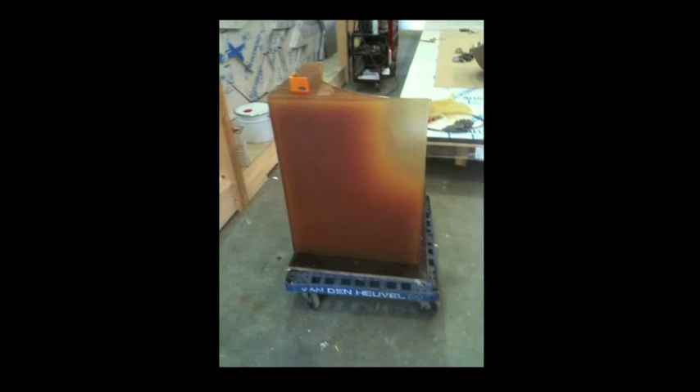Here you can see we did a few experiments just to test effects and to also test how the frame would work, if you would notice the frame. Well, you didn't notice if you painted it in the right color.

The other tests we did were actually on surface. We were very aware that there was a very practical issue with this thing. We knew that we had to make this interior out of polystyrene, very cheap polystyrene, and it was very easy to handle, so that would be the interior element. Then we had to find out how it would actually react to this artificial rubber, and whether you'd get a dirty surface. So what we did was a number of experiments where we used different oils.

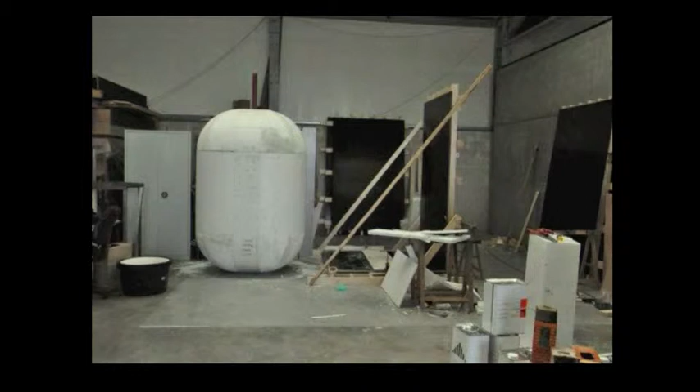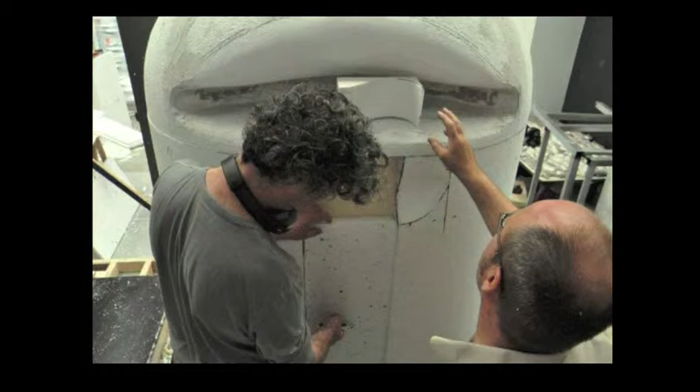In the end we discovered that, well, here you can see the interior. This was the polystyrene interior of the rubber house, and here you see the people actually working on it. It's like a sculptural object. Very funny. You build an interior as a massive thing.

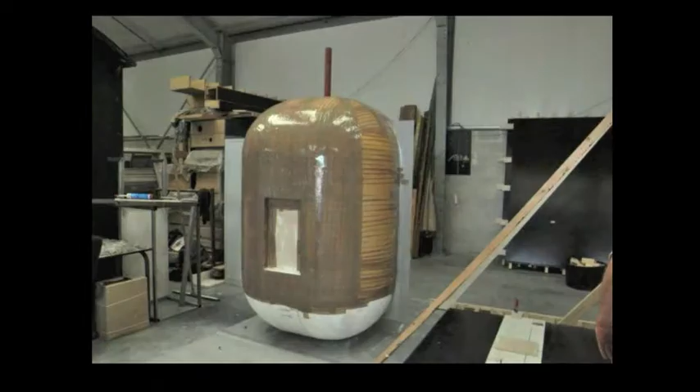For us, the most beautiful way to treat the surface was actually to use this very cheap plastic tape and cover the whole object with it, because we knew from experiments that you would get a kind of three-dimensional print on the surface of the interior that suggested something organic, since the tape wasn't regular and had little differences in it. We found that very beautiful. So we used the tape, sprayed a little oil on it, and then the pouring started.

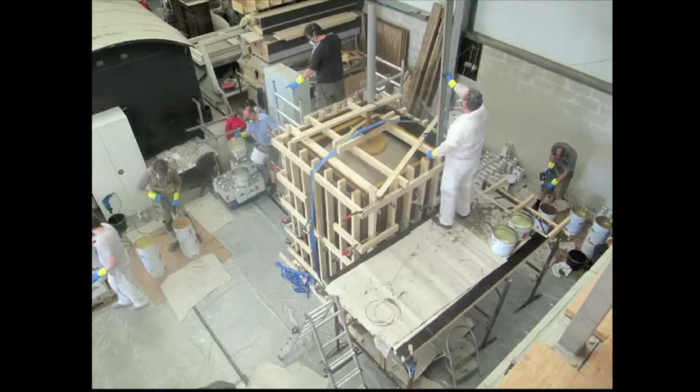Since we didn't know the effects of this amount of artificial rubber, we didn't want to take any risks, so people used all kinds of masks for chemical reactions. Some people warned us that with this amount you'd get an enormous heat, and others said no, it wouldn't happen. So we were prepared for the worst, but everything went well.

Here you can actually see the cube. Inside is the polystyrene interior, and then everything is poured in. Then when the pouring was finished, just like concrete, it didn't take much longer.

Then we had to get out the polystyrene. Some people said you could maybe use some chemical stuff, but we didn't trust it, also because we thought it might affect the surface again. So actually the demolishment of the polystyrene core had to be done in a very funny way. There was a kind of hole in the rubber house, at the bottom, and they simply dug their way in, just like people digging for precious metals.

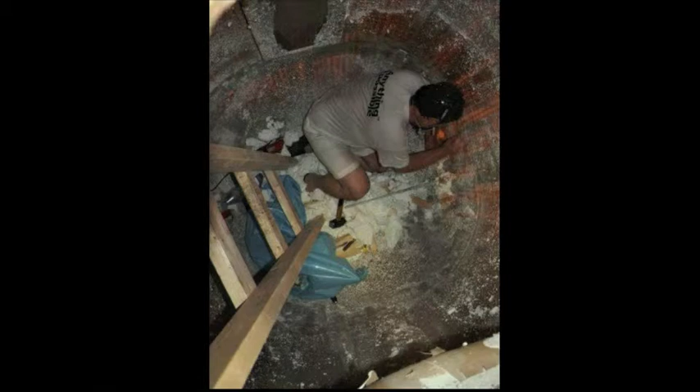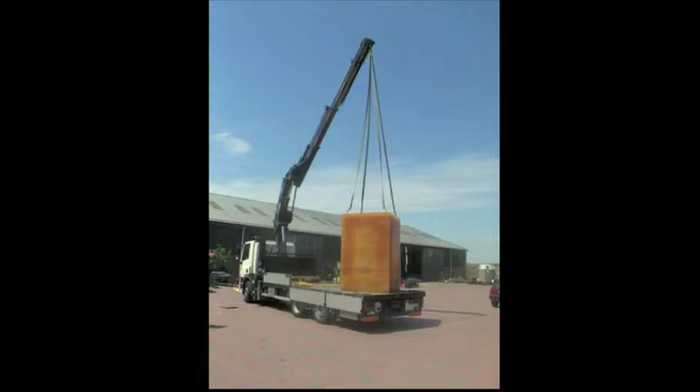Here you can see it in the final phase. He has already removed most of the polystyrene and is now very precisely removing the last parts. This phase actually took a lot of time, and the builders really underestimated it. But they were also very nice, and they did it. Then it was finished, the rubber house was finished.

Actually, the metal frame we used to make sure it would stand up proved to be very important, because we used the metal frame to have removable screw eyes placed on top, so that we could transport it. Then when it was in the right place, you could pull these things out again very simply—you just needed a ladder—and then the rubber house had a flat roof again. Here you see it standing in front of the place where it was built by these very friendly people, still with these things on top, ready for transport.

And here you see the final image. It arrived in Germany and was used for a performance by the theater play, in a very beautiful setting in the evening with lights on it. So that was a very interesting project, a very small project. We had just enough money for buying the materials—we didn't make any money out of it. We were in a lucky position.

I was talking about the 90s and how good it was for Dutch architects, because we, as a very small office, got a very big commission called IJdock. I'm going to show some things about it. We actually did two buildings in this huge block—an enormous block with a parking underneath, standing in the water in the IJ, very central in Amsterdam.

It was an artificial block, and there were four architects working on it. Our office was doing this building and this building, and other offices were doing other parts. One office did the parking and the public space, another did the Palace of Justice at the head of it, and another office was doing a big hotel for a Spanish company.

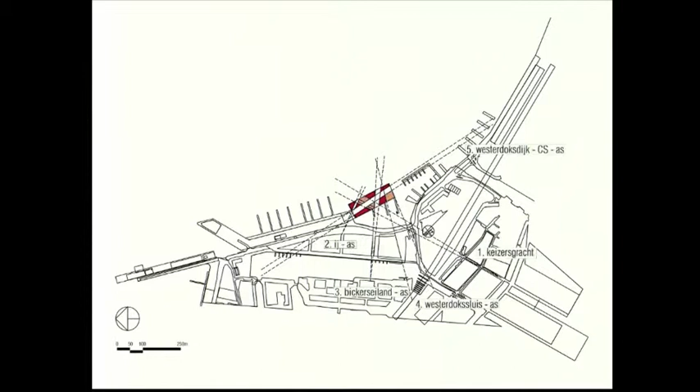Because what was the idea? You had in red this urban block, and then they said, okay, we just fill this block up, and then we cut out simple cuts that are related to the environment, and we kind of exaggerate that a bit. It's really like a piece of styrofoam.

Putting on the cutter and cutting out these spaces. And you see, this was the urban plan, so we didn't design this strange shape. If we had to do this building, we probably would have done it differently, but we had to design how these things would look, exactly how these facades would be, and also try to get the floor plans right in there.

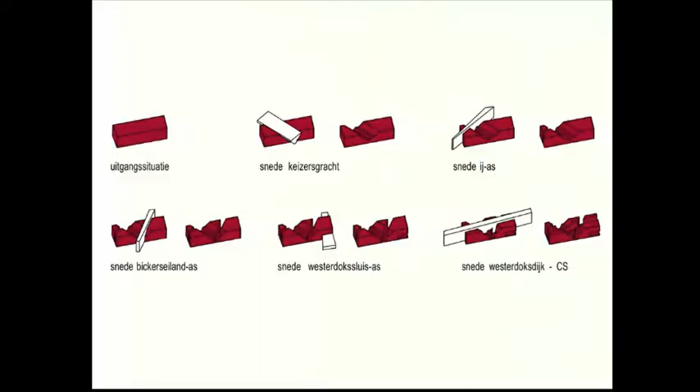Well, this was also a project that took a lot of time. We had discussions with Enrico about architecture being some sort of time machine, and he said that it happens a lot in Milan, but also in the Netherlands. This project took a lot of time. We started in 1999 - I think the urban plan was already a few years old then - and we finished it actually last year. So you can imagine, took a lot of time.

We did two buildings: one office building, a small office tower, and one housing project. I'm going to show both of them.

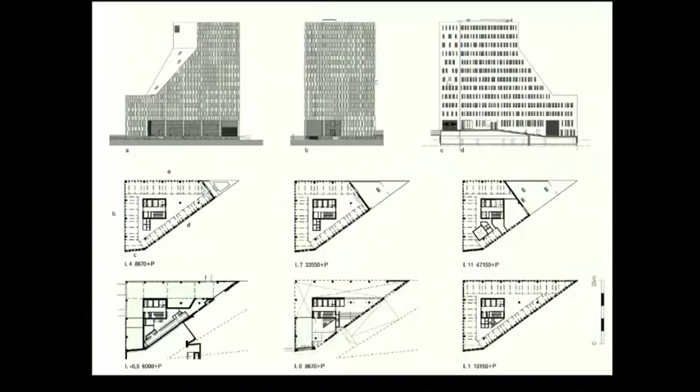We said, okay, if that's the case—we knew there were also restrictions about energy use. They said, we don't have so much money for your facade because we spend all the money on the Palace of Justice, so it has to be a cheap facade. But for energy regulations, you can only make 30% of that facade open. So we said, if that's the case, then it will be a facade with windows. We experimented, knowing we have 1 meter 20, but asking how can you make a building that's still lively, not so typical office-like or rigid.

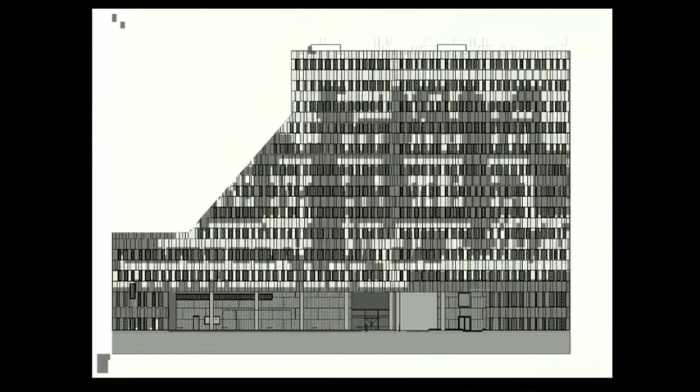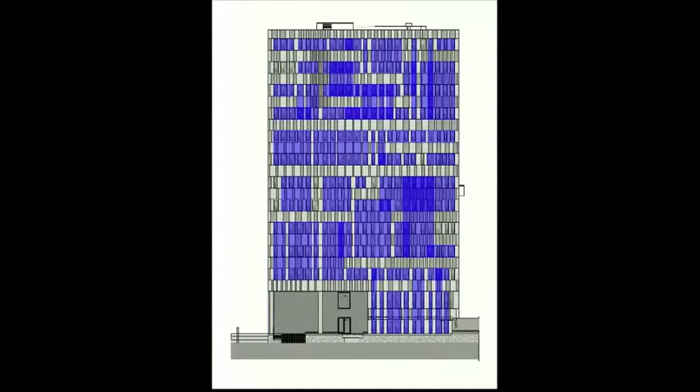So we started to experiment, as I described, with patterns in different ways. This is an early experiment where we folded out the facades, and this is a later experiment, which is actually how the facades developed. It's very difficult to understand—if you see the building you think it's a completely random facade, but that's not really true, because there are certain areas where we say, okay, we're going to make it more dense here and less dense at another spot.

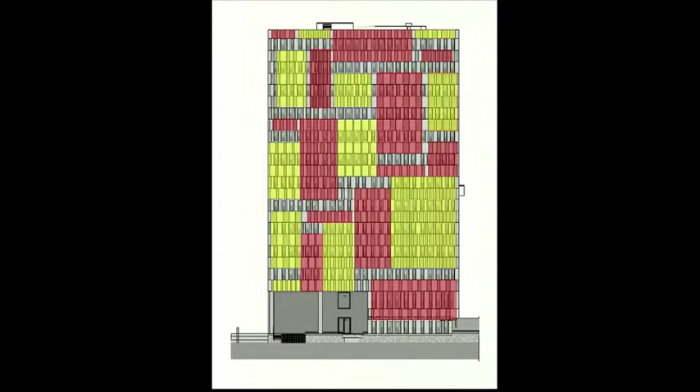We also introduced kind of symmetrical elements in themselves, so you could say these form one unity. The yellow ones form another unity, and you could say they become the symmetrical organizing elements, and we combine it with another system that runs through it. So in the end, you can no longer read that anymore. That was for us a very interesting way of working.

This is a picture of how the composition of the facade in the end looks, also with the different materials. We said, okay, the window will just be one of the panels in the facade. So you have the window, and a panel which is a very simple and relatively cheap panel made of artificial concrete, very thin. But on top we make it rough, and on that top we put little glass.

Remnants of glass, which are put in a machine but are still a bit rough, are put onto the panel, so you get a very rough panel—that's the light gray panel. The other one was actually the same panel but with a bit of dark cement in it, and that one was polished after putting in these glass elements. So you had a very shiny dark panel and a very rough light panel.

With these three elements we created a facade, because we wanted to have a facade that was one unity, where you couldn't really count the floors. So that's the idea about the facade. Here you can see how the two facades work together.

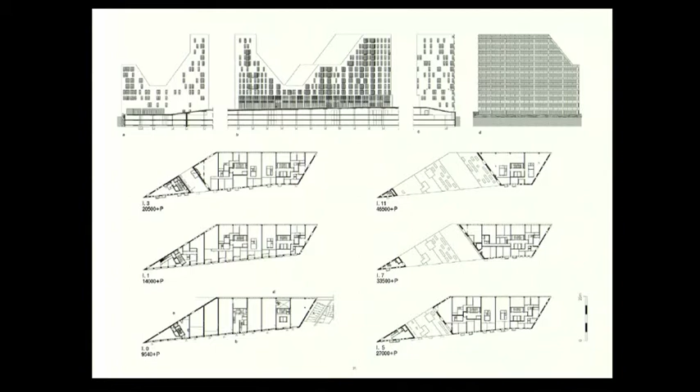So we said, okay, in this strange shape, we managed to get three cores, bringing the people up to the top floor. At the very sharp point, for us that was essential. That's what we had a long fight, a continuous fight with the client about. We said, we want this sharp point to be inhabited. Because he said, no, we just put all the chimneys there, it's impossible that somebody can live there. We said, no, it has to be inhabited because it's very essential that the whole form is actually used for housing.

And you can see, of course, it has the strange shape, but we managed to get actually quite simple, efficient apartments in there. And the basic idea of all these apartments, all quite different because of the different shape, but they all share one thing: they have a beautiful open space near the water.

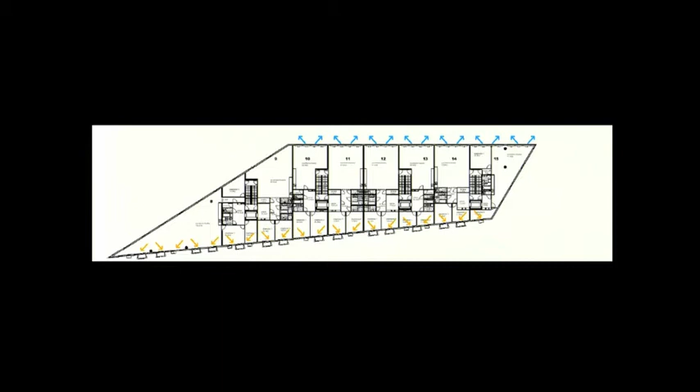On the other side, we made a much more closed side where you can imagine the bedroom, and there we want people to be more protected. But at the water, we actually want no facade at all, because it's not simply the view to the water, it's also the experience of the water, to feel the wind, to hear the boats that pass by, and to smell the water. So we managed to get an opening which is really, if you open the doors, a lot of people are actually scared to walk to the edge of the floor.

This is a kind of foldable aluminium facade that we managed to develop for that. Here you can see that facade, all these doors and the opening, and you can also see the little fence, completely made of glass. We convinced the contractor not to put a coating on this glass, but to leave it as it is and fix it on the ground.

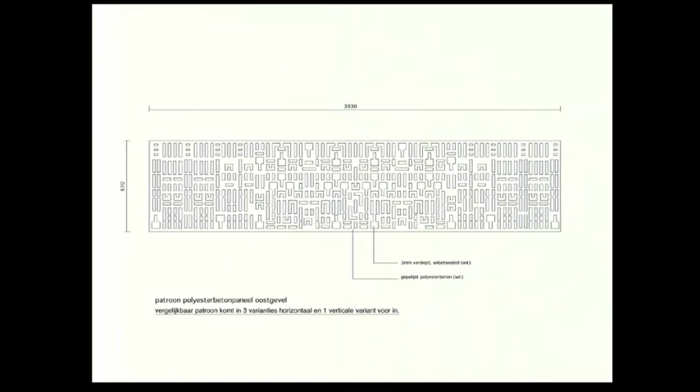Then we come to the patterns again, because these bends in the facade we used to introduce a pattern and a motif in it. We made special drawings for that, because in a way that was becoming the motif of the building. This one is a 3-dimensional motif, which is very interesting, because if you look at when it was produced and the molding, it almost looks like an urban plan, since it has a third dimension in it. This is how it looked in the end.

We think it's nice because over time these panels will get a little bit dirtier, and you'll notice it gets dirty in the different layers also. So even the pattern will become more visible, because right now it's hardly visible - you really have to be very close to it.

For the other side, which is not on the water, where we projected the smaller rooms and bedrooms, we said, okay, this building will be in between an office, a huge palace of justice, and a huge hotel, and all these architects made their buildings very abstract - we also did it with a little office tower. We said, now that people will live here, we have to show that it's a building for housing, that it's not an abstract building.

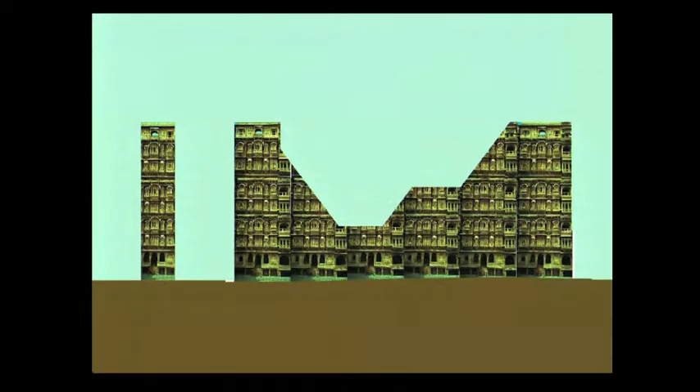So we were very inspired by buildings from India, where you have this kind of exaggeration of balconies, shutters, and ornaments. That was one of the first experiments - we said, okay, if we copy literally the facade of India and put it on, what will happen? We actually liked this image, also because it introduced something of a plinth inside it, and we thought that's a good idea.

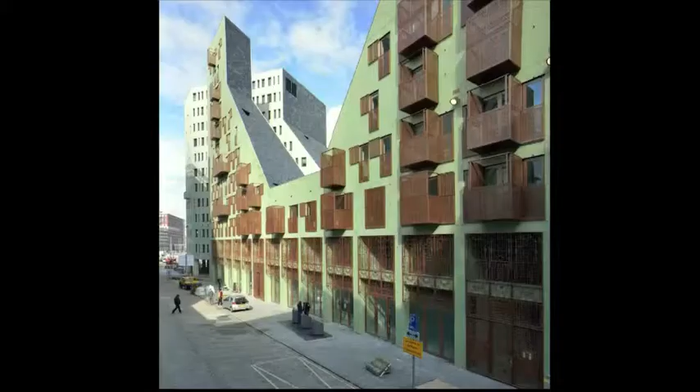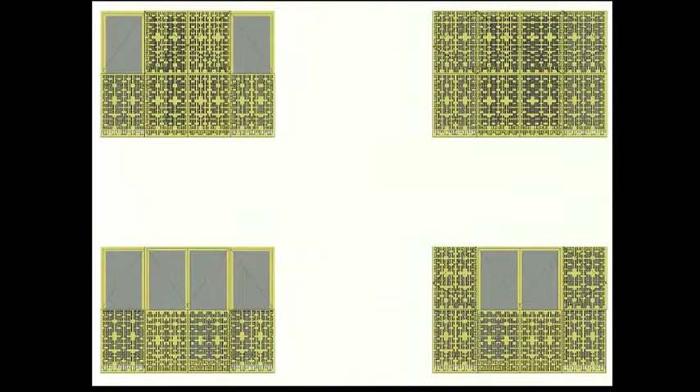So this is what we had - we made a facade with all these, in an Indian style, balconies, shutters, and fences. This exaggeration of all these little elements gave the building, on one hand, we think still a high building, 11 floors high, still a metropolitan building especially for Amsterdam circumstances, but on the other hand it also has the scale of the human inhabitant. The balconies were developed so different panels could be placed in different positions, which also makes the building more lively.

We developed, of course, again a pattern, this time cut out of the aluminium. Again there are kinds of symmetries in that, and things are changing, and in the end you can hardly recognize it anymore - it becomes some sort of chaos.

5 minutes? Oh, stop? 5 minutes was before. Okay, I'm going very fast through it.

What we like very much is the shadows, of course. Also, we did a variation on the ground floor.

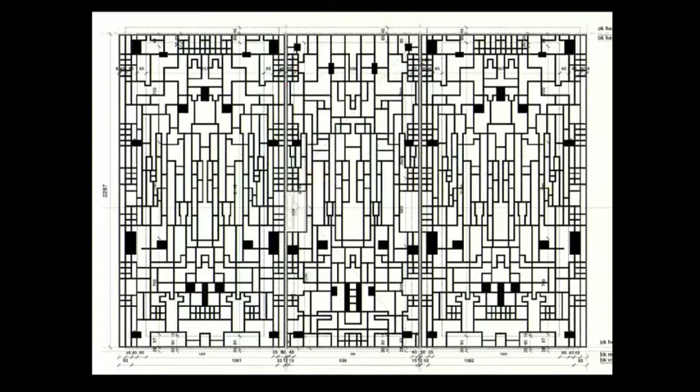In the interior too, we said, okay, here we don't have much budget, but we can simply print it on very simple white panels - we get a black and white version of the drawing. We even did some experiments with the carpet, managing to get a carpet which does the same thing in green.

This is the little tower that's inhabited - it's an apartment of 9 floors, amazing. One guy is living there, and on the top floor there's only room for a kind of spiral staircase, where he makes a little library.

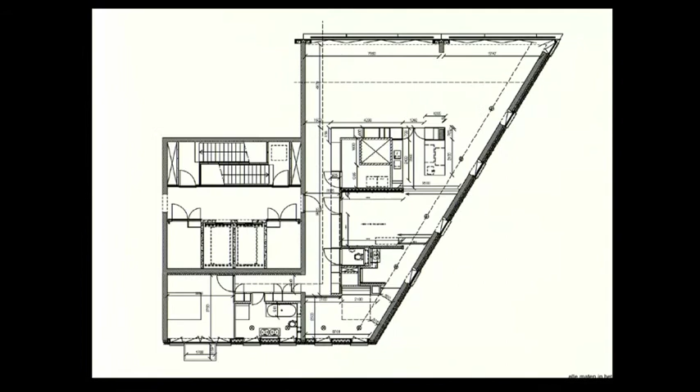This is an interior that we did on the top floor. I'm not going to talk about it.

This is, if you allow me Hector, the project that tomorrow will be decided if it will really happen. So I'm very nervous about it. I will call Michael tomorrow or email him.

This is an art project. We were working together with 2 artists we didn't know, we had never worked with them before, but some committee said you have to work with these 2 artists. And that didn't really work, so in the end we did the little building with the roof, and the other artists, one is doing the 2 large piles and the other is doing the wall.

What was the assignment? They said we want you, as artists and architect, to give expression to the meeting in an area full of schools. They called it a campus, a very strange word for this very provincial little town in the Netherlands, because actually it was no more than a street with a number of large schools and parking spaces around it. So we said, that's a bit weird, why talk about this campus? Is this just a managerial way of giving it a name and assuming everybody will love it?

We talked with a number of students already there, and we found out that actually the students lived somewhere else, came by bus to this place, went to their school, and didn't have much communication with each other. So we said, okay, what is the meeting place here? It's the bus stop. So we have to design a bus stop.

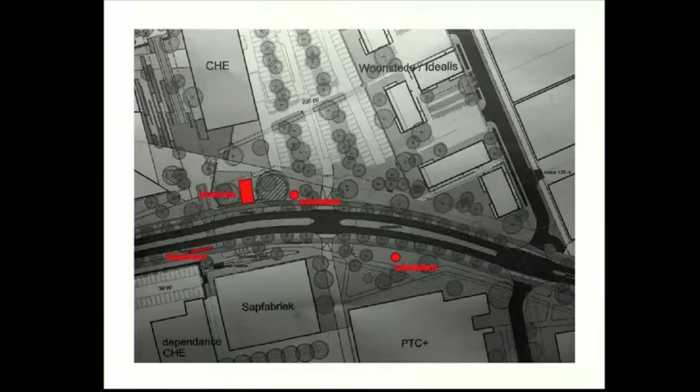So the wall is designed by one of the artists, which is one of the bus stops. We actually did a little house, which also gives some shelter for the rain if you're waiting for the bus. And in the house, maybe something interesting is happening - we had to find out.

So we said it would be interesting to have a bus stop where you can wait for the bus, but also a little building behind you where you might discover something - maybe it doesn't have to show immediately. So we made a door with a keyhole, and we also made these big chimneys, but not for fire, actually to let the light come into this interior space.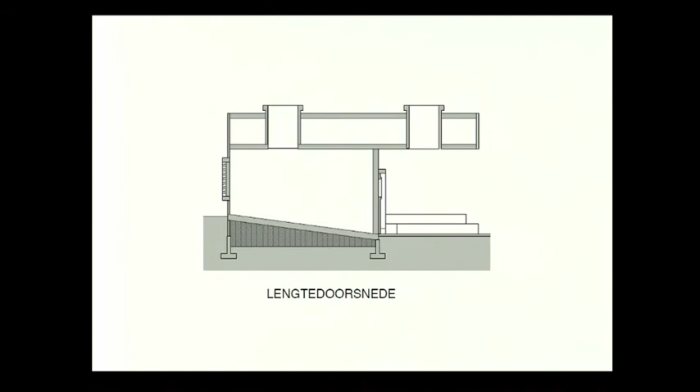We had long discussions about what this interior should be, and in the end we said it has to be the most private interior you can imagine, because the bus stop is then the public space, and the confrontation of the two would be interesting. So we said, okay, we make the bedroom of Vincent van Gogh, which is also an interesting painting in his oeuvre, because it's not only the distorted perspective, but also the fact that he made this painting without any shadow - it only uses colors, and there's no shadow painted anywhere.

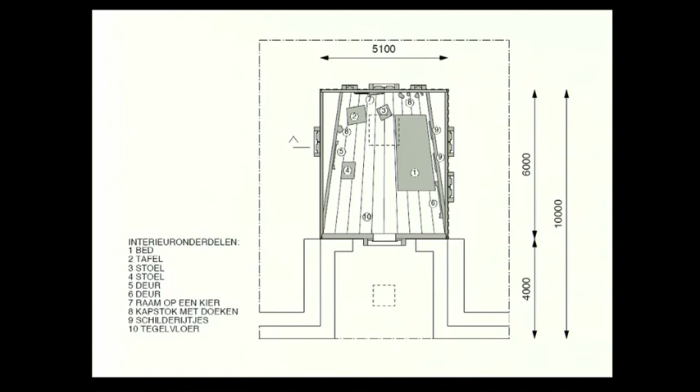So what we did is build this interior exactly as it should be, as a reconstruction of that painting. Also, we made the whole building in concrete, not in wood, and then in the concrete tried to exaggerate the effects of wood with the textures and stuff like that.